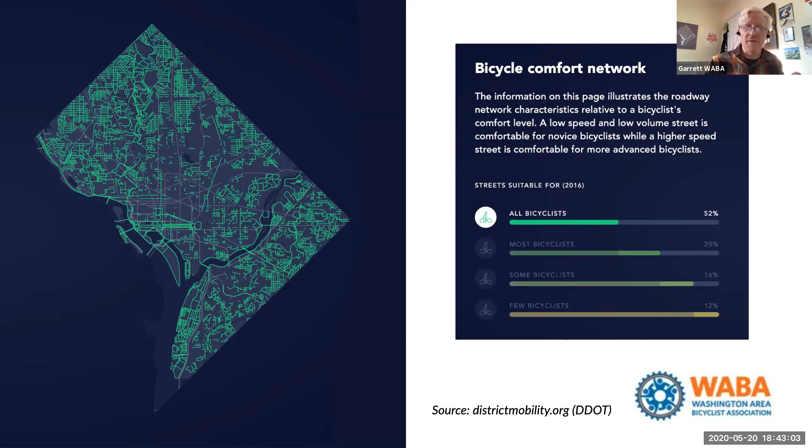So at the top is routine maintenance. This is filling potholes. This is restriping crosswalks that were already there, or restriping bike lanes that were already there. These are day-to-day maintenance tasks. They don't cost a huge amount, and they don't take all that much time to carry out. Quite often, these things are handled through a city's 311 system. You report a pothole, and within a couple of days to a couple of weeks, it's repaired. But major changes are not happening at this level.

Taking a step down the tree, we have projects that are restriping or repaving. For instance, most cities and counties will repave their local roads every 5 to 10 years. And when repaving a road, you have to restripe it afterwards. That's a really good opportunity to ask the question, could we put it back in a different way? Very often the answer is yes, if you're asking the question. Unfortunately, a lot of times things are just on autopilot and they put it back exactly how it was before. But this is a big opportunity for us.

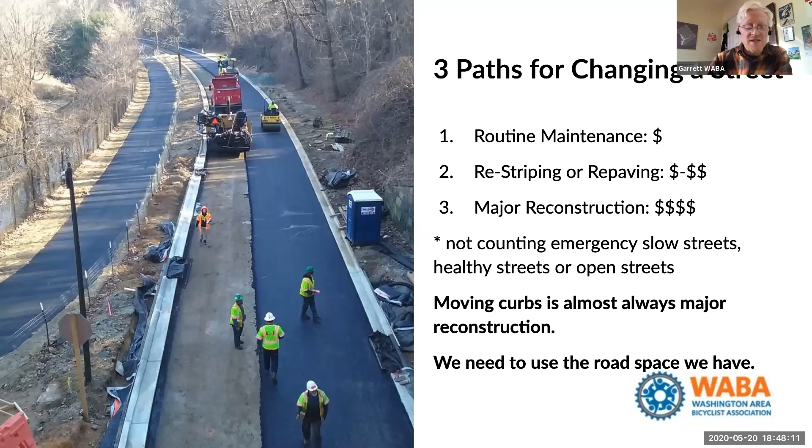Okay, so you might be thinking to yourself, yeah, okay, but what does this actually look like on real streets? Here is not a real street, but an example of a street. So our cities and counties really need to be more creative about the space that we already have.

In most places, like this one pictured, you have buildings. You can't just go widening roads, both because it's very expensive, it takes a very long time, but also there may be buildings in the way or private residences. So just expanding out is not practical and certainly isn't quick. But we can be much better about working with what we have and working with the streets that we have today. You can just throw down a new line of paint and dramatically change the way that people use a street.

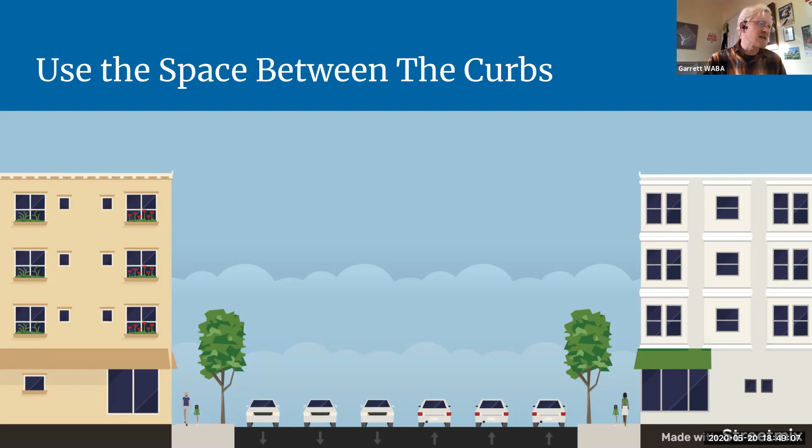So getting a little more into the geometry of things, we are looking today at the space between the curbs. This is sort of the curb to curb width or curb to curb distance.

All right, I'm just catching up with, thank you, Jason. That's a very good point about striping. Different communities, it's a different timeline.

But we're focused on what can we fit between the curbs. Kind of put your blinders on, try to ignore what's happening outside of those curbs, try to ignore, if you can, the very narrow sidewalks. And let's just think about what we can do between those. And that's sort of what the focus of our next few minutes will be. Before we get to that, I wanted to just quickly pause. Oh, no, we'll get to questions in just a minute.

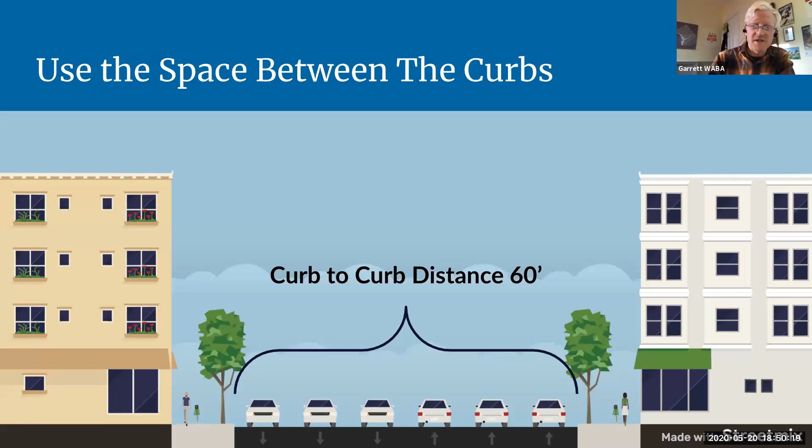Okay, so the question is, what can we do with that space, right? How do we actually change a street? The example I just showed you, all of that space is already divvied up. There's plenty of car lanes. What can we do with it? One thing we can do with it is something called a road diet. This is a handy animation that shows what one of those could look like.

The fact is that roads can carry far more people with fewer travel lanes. In fact, often they can carry far more cars with fewer travel lanes, which is sort of paradoxical, but true. Very often, eliminating a car lane creates more space for biking and walking. And so this is a great tactic we should be looking at. What you're seeing here, this is a classic 4-to-3 road diet.

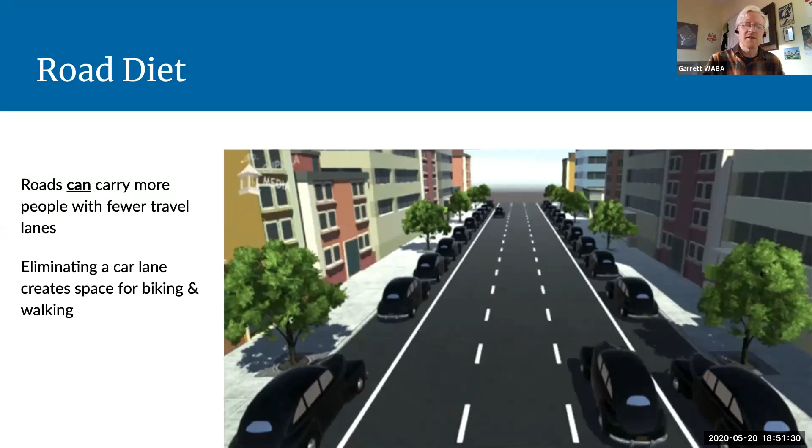There are other ways that this can be achieved. Here's another example of a road diet on a one-way street. So this animation, I think, makes it pretty clear. You take the existing space that's mostly devoted to cars, you squeeze it down. Maybe you squeeze down the travel lane, squeeze down the parking lane, and suddenly you have all of this extra width to put in bike lanes or protected bike lanes or whatever you're looking for. So road diets are a really fantastic way to work with our streets.

Another option is something called a lane diet, which is sort of a similar idea. More space than necessary is devoted to moving cars. And if we just squeeze things down a little bit, we can find some more space for, say, bike lanes. Another reason that this is a good idea is that many car lanes are just far wider than they should be. And wider lanes very often lead to more speeding.

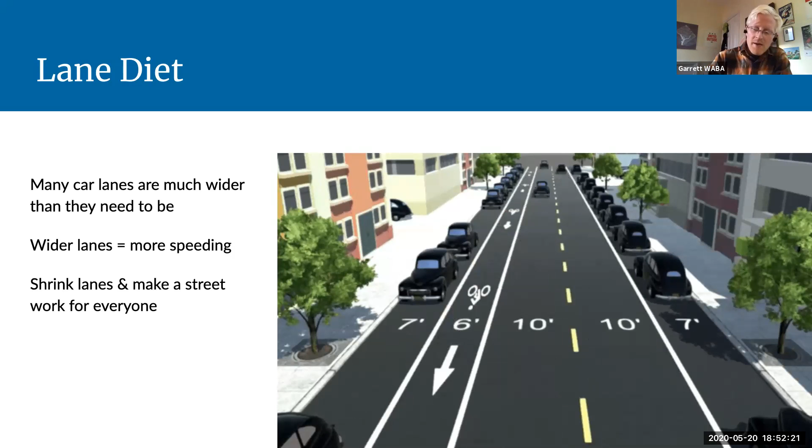There's quite a bit of evidence that suggests that wider lanes make drivers feel more comfortable traveling at higher speeds. So wider lanes give you higher speeds. So just squeeze them down and you get a street that can potentially work for everybody, or at least work for more people. So lane diets and road diets are really quite terrific.

I want to pause there and just see if there are any questions on that topic. Obviously, we're going to go into much more detail. If you do have a question, you can go ahead and just unmute yourself.

And I'll wait just a few moments. Okay, great. We are all on the same page.

Okay, so we have a sense of road diets, lane diets, squeezing things down, right? But we can't just go start squeezing things down willy-nilly, right? Otherwise, we might find some unintended consequences. So how much can we actually squeeze things? What are the limits? Where do we want to stop?

What you all probably know that you have sort of felt, but maybe never really recognized, is that the design of a space, the amount of space that we allocate to moving different people or different modes, actually dramatically changes the way that people use it. So the amount of space might determine the volume of users that can get through, either the number of cars that can get through in a given moment, or the number of people on bikes or people on foot. It can determine what a comfortable speed is, whether you actually feel comfortable going at a reasonable speed, or if it's just too cramped in.

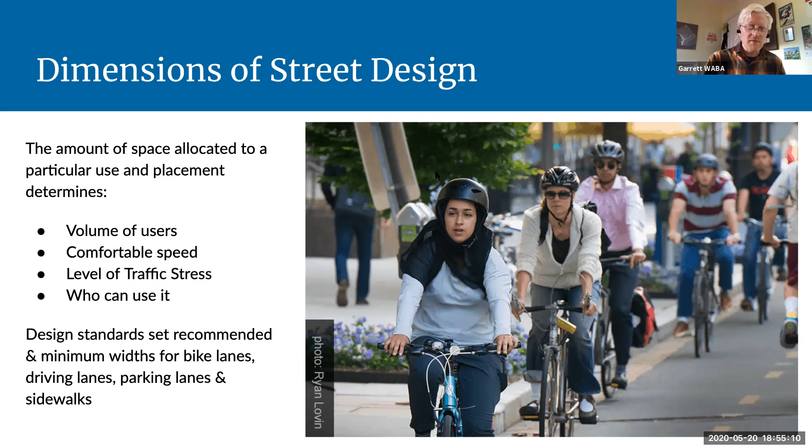On sidewalks, for instance, this is the reason that the Americans with Disabilities Act was passed, and all sidewalks are a minimum of 5 feet wide, so that somebody using a wheelchair can actually pass by. Now, these aren't just arbitrary standards. For the most part, they're set by various government and engineer groups, which you don't need to be familiar with. But we will look at just a few, and then we'll get on to an activity.

Okay, so first up, with those road diets and lane diets, the thing that we did first was we squeezed down some driving lanes, and we squeezed down some parking lanes. There are many advocates who would say, well, just get rid of all of them. Streets should just be for walking and biking. I don't disagree with that, but very often other people in the room do. So it's good to know what the rules are that they're working with.

Most typically around the city, you'll see 11 feet or 12 feet, but a lot of 10-foot wide lanes. If it's a route with buses on it or with heavy truck traffic, sometimes the planners will insist on 11 feet for buses, which gives them a little more maneuverability room. But 10 feet is usually sufficient.

For those parking lanes, really, for space that's just going to be used to store a car, where it's not going to be moving much, 7 feet is perfectly sufficient, right? But typically you'll see 8 feet, and for larger vehicles, if it's a bus loading zone, or another kind of loading zone for commercial use, you might see wider. But 10-foot driving lanes, 7-8-foot parking lanes, perfectly good.

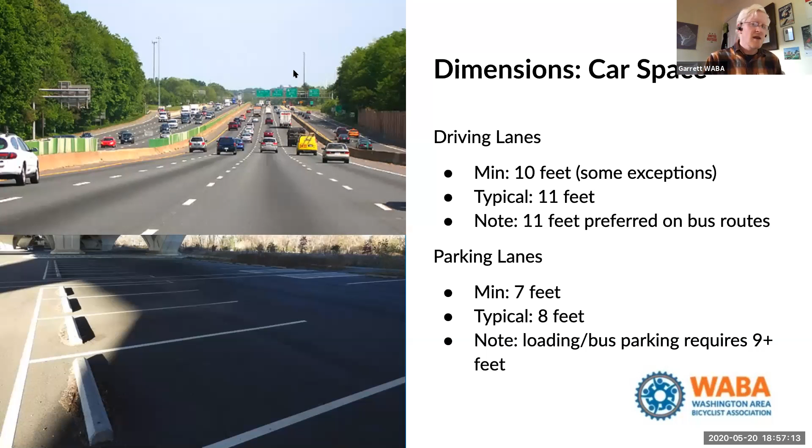So context is really key in how much space we give to bike lanes and how great they'll be. So with that in mind, here's a couple of those standards. Protected bike lanes typically come in 2 flavors. You have one-way protected bike lanes, where you have a bike lane on each side of the street against the curb. Or you'll see 2-way protected bike lanes, where you have both directions on one side of the street. In both of those configurations, they'll have a buffer between the bike lane, the rideable area, and the cars.

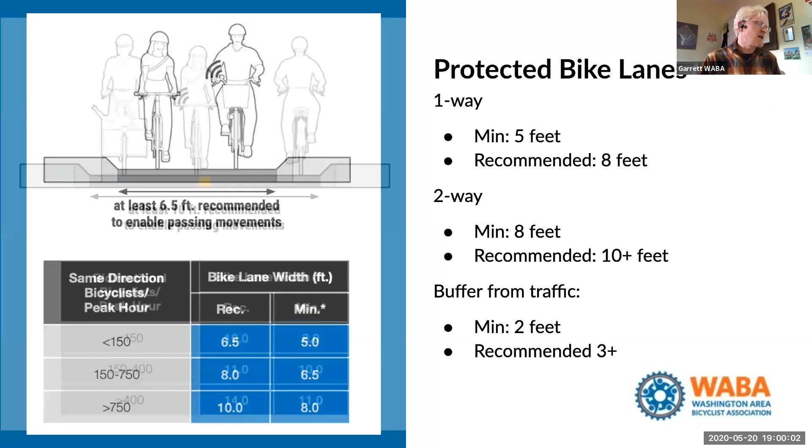But if it's quite a lot more people, you want to give people more space. People who know DC's protected bike lanes, 15th Street is regularly getting more than 300 bicyclists in the peak hour, and things get very busy. You want that space to maneuver. But these are the numbers for one-way protected bike lanes. Now for 2-ways, we want to get more space, right? So once again, a minimum of 8 feet, and ideally getting up to 10, 11, 12, 13, 14 feet. So more space gives more people more room to breathe.

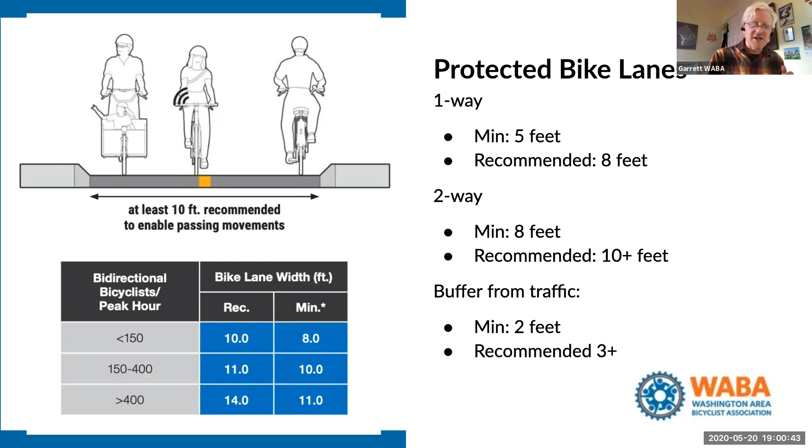They can pass each other safely. They can ride side by side potentially. Families with kids can keep everyone together a little bit better. And you'll see a lot of disagreement about exactly what the best numbers are here for width and space, but I would say stick with these. The state of the practice has been changing quite a lot. We should talk about regular bike lanes as well, because there's still plenty of places where those are appropriate.

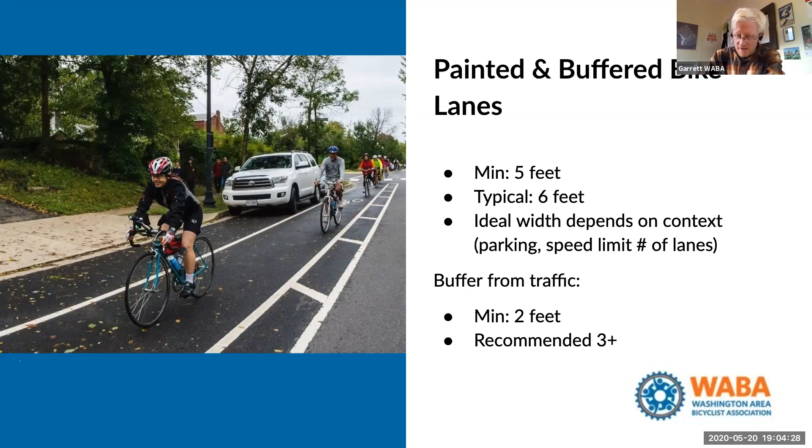Protected bike lanes are a much better case for that. Okay, and we'll have plenty of time at the end. I want to make sure to keep on rolling.

Okay, so let's actually play around with this sort of geometry of street design. I showed you earlier a handy graphic from a tool that we love to use called Street Mix. It is free, it is available online, and it's super easy to use. And actually, I'm going to walk you through it real quick. It's a good way of taking a look at a street and asking the question, you know, how could we redesign this? What could we put here?

So I'll show you real quick just what Street Mix is all about, and then we're actually going to do a small group activity to take a look at some of the streets around the region and play around with alternatives. So if you'll bear with me for just a moment, I will get this loaded up. You can play along at home if you like. And it's not streetmix.com, it's streetmix.net.

Okay. There we go. I'll just give you a very quick orientation of what we're looking at here. Let me switch my screen over there. Okay. Great. And so now you all should be seeing Street Mix, which is basically, imagine if you were just sitting in the middle of a street and looking down. You get sort of a nice cross section of what's happening on the street.

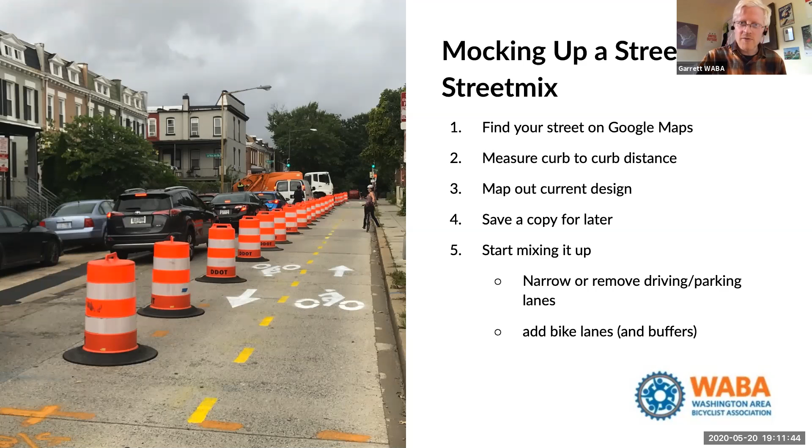To spend a moment actually playing around with this, we're going to do a small group activity. We're going to split up into groups using the Zoom breakout rooms. Looks like we have ten people. We're going to do three small groups, and each of you is going to do what you see on the screen. Take a look at the shared notes, which are in the chat right now. We'll have groups 1, 2, and 3, which you'll be dropped into in just a moment.

Your job is to mock up the street that you've been assigned. There's a link to a Google Maps area. With your group, dive into that, try to mock it up in Street Mix, and try to find at least two different alternatives for how that street could be redesigned. We'll give you a couple of minutes, and then come back to report back.

Just try to save the URL from Street Mix into the shared notes, and pick a presenter. It may also be helpful for one person to share their screen, which you can do in the breakout groups. So I will split you all up. If there are any questions, I will duck into those rooms.

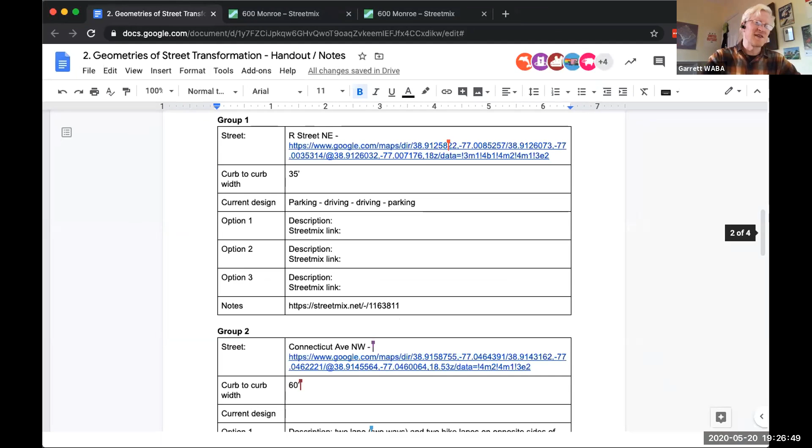I'd ask that everybody put the URLs to the streets you created into that Google document, and we can very quickly run through those. If somebody wants to present, or at least very quickly hop on video and say what y'all did, I can throw up the street that you created. It looks like group number 2 has something. Does someone from group number 2 want to jump in?

We did manage to mimic the street and make a change to it. But we were chatting about the unlikelihood that it would change, although somebody seemed to know that there were bike lanes originally planned for Connecticut. Okay, so you were looking at Connecticut Avenue, just north of Dupont Circle. Yeah. Okay, so it looks like you found some space to squeeze in some bike lanes.

How did you make space to do that? Those were originally two lanes for cars, and so we made them one lane. Okay, awesome. You said you don't need that much space, let's just do it with less. Love it. And I see that you left some parking for all the merchants there. I'm sure people will appreciate that. We're living in a fantasy land right now, so such things aren't all that relevant.

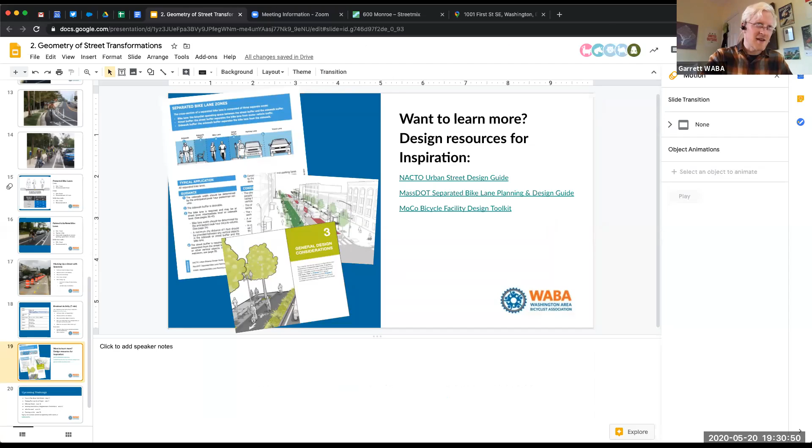And group 1, did y'all get anywhere you want to share? It's all right if you didn't. Okay. Well, that's all right. We can switch on back and finish right up. We're just coming up on time. Okay. Just 2 more slides.

So that was, I hope, a very quick introduction to StreetMix and what you can do with it, and also some of the numbers and constraints that we're working with. But also a huge opportunity. You know, asphalt is asphalt. We can carve it out from one use and give it to another. If you're looking for more inspiration of how some of these street transformations can happen, there are some really quite readable and pretty resources you can leaf through.

The National Association of City Transportation Officials, NACTO. They have an urban street design guide. They have bikeway design guides, which are full of pretty pictures of how bikes and bike facilities can be integrated into streets. The Massachusetts Department of Transportation has a really revolutionary, for the United States, design guide for protected bike lanes and protected intersections.

If you're interested in the nitty gritty of, you know, how wide should a bike lane be? How wide should our buffers be? How should it approach intersections? How do we keep bicyclists and pedestrians interacting safely? This is a great resource, but mostly very pretty pictures.

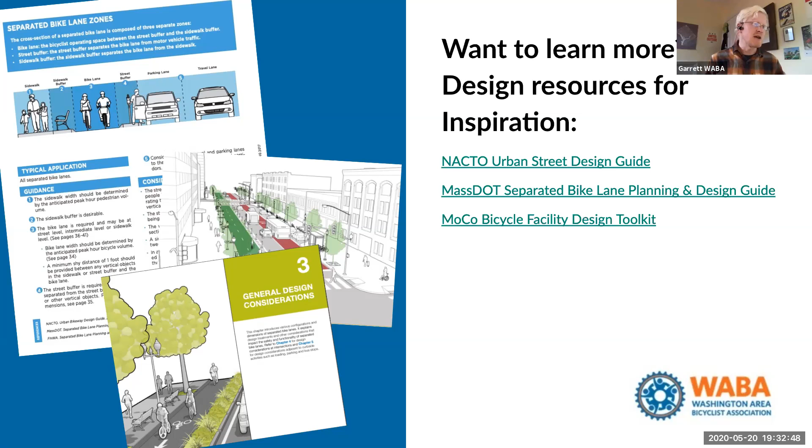And also Montgomery County, very locally, when they updated their bike master plan in 2018, they created a bicycle facility design guide as well, which features some really good ideas. We talked a lot about protected bike lanes today. There's great guidance in there on what they call neighborhood greenways and other treatments for streets that might not be very stressful, but could use a few changes to make them more appropriate for low stress biking. So there are links there and also in the notes.